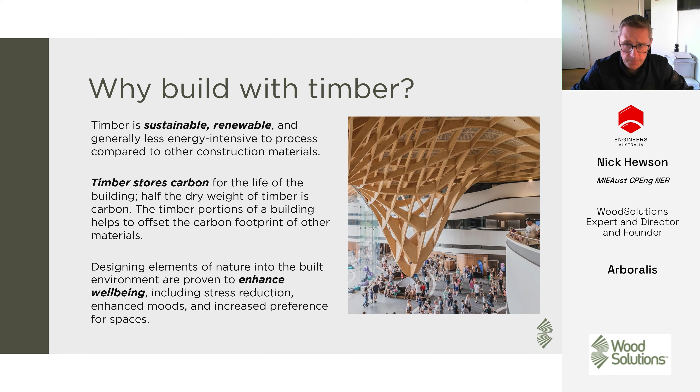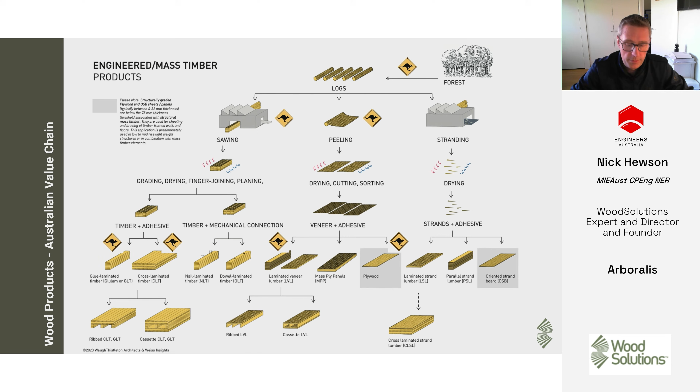So just a quick overview for those of you not familiar with engineered or mass timber. When we're talking around engineered timber, that refers to anything that is taking a tree, cutting it into smaller parts, and then putting it back together. So there are a range of different products in there, from things like plywood through to probably the big three that we talk around more often than not in buildings: cross-laminated timber or CLT, glue laminated timber or

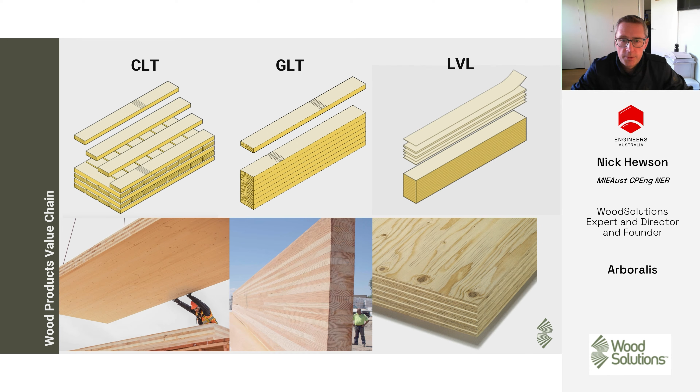GLT, and LVL. In the case of CLT and GLT, they're created by cutting up logs into individual sticks of timber, then gluing them back, either in cross layers to form CLT planks that create walls and floors, or glulam all aligned in the same direction to create beams and columns. LVL is a bit of a halfway house between the two. That's kind of like a jumbo plywood; it's created by peeling logs into lamellas and making those back into billets, which can be used for beams, slabs, columns. So it's really these three products that have captured the market in terms of mass timber buildings.

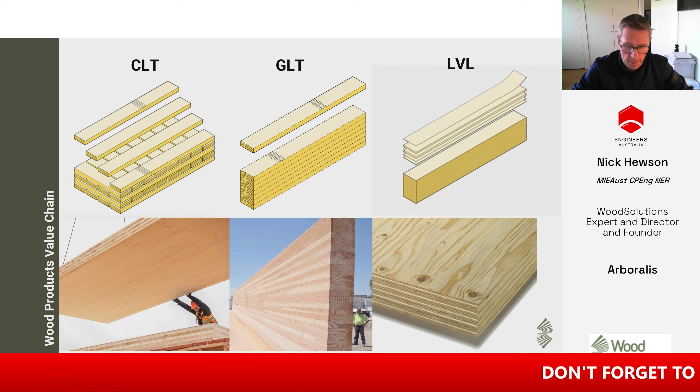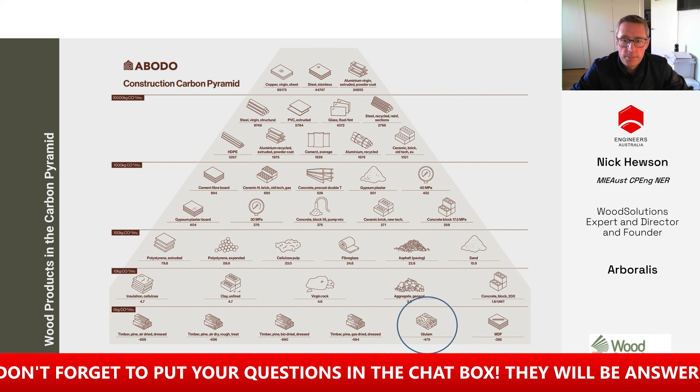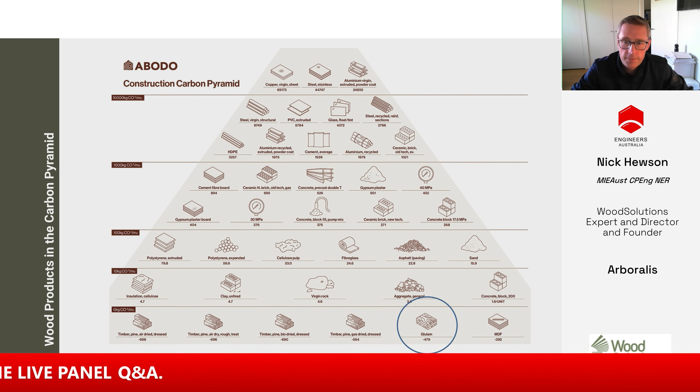So just looking at a little bit of the hierarchy of the construction carbon pyramid. As you'll see, timber products and engineered timber products like glulam are very, very low carbon if you include the sequestered carbon, which is the carbon that's locked into the structure as the tree grows. Through photosynthesis, trees take in carbon dioxide and produce oxygen, but that carbon is locked into the material for its lifetime. So it's a very environmentally sustainable form of construction when compared to others like aluminium, steel, concrete, and the like. So this is why we're focusing very hard on trying to get more timber into more buildings.

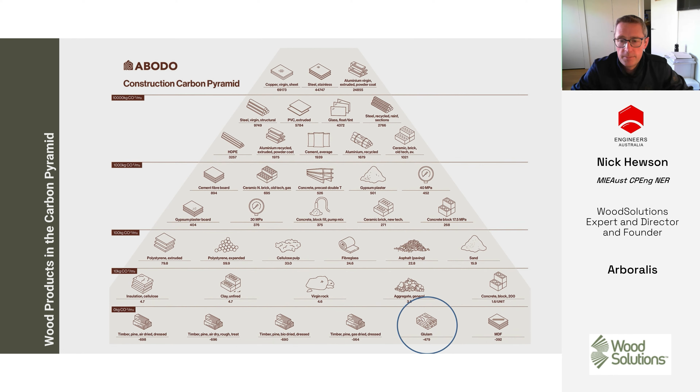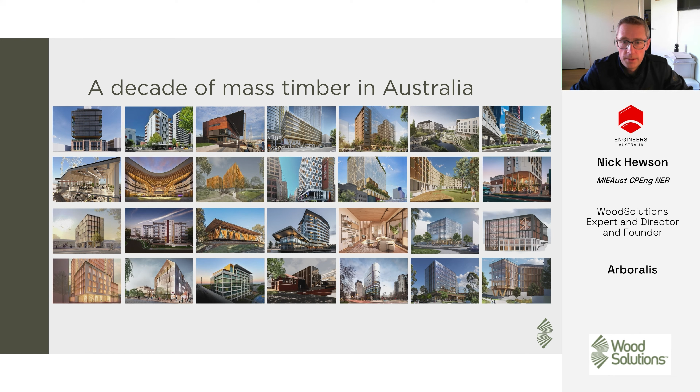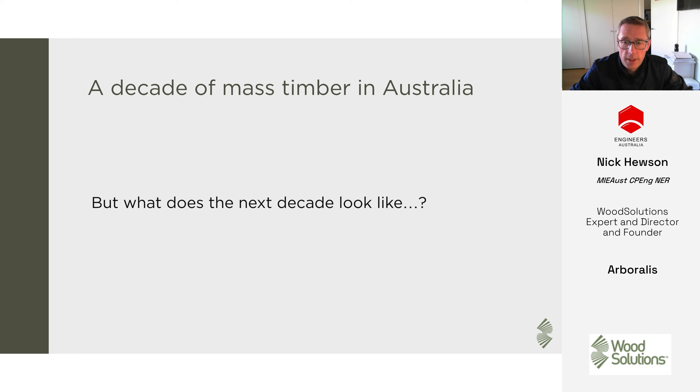We have a host of other buildings on there which have gone on to achieve worldwide acclaim, and per capita, I think, we've probably got an extraordinary number of mass timber buildings up, and really have some world-leading examples. But if that was the last decade, with a lot of purist, fully timber buildings, what does the next decade look like?

Increasingly, I think we're seeing timber start to find its way into larger high-rise buildings and into different building typologies, and what we're really passionate about is normalizing timber so it becomes just another structural product that we can use. It has its advantages and its disadvantages, which we'll run through. But we're trying to take some of the more carbon-intensive materials out of high-rise construction and substitute in timber where we can.

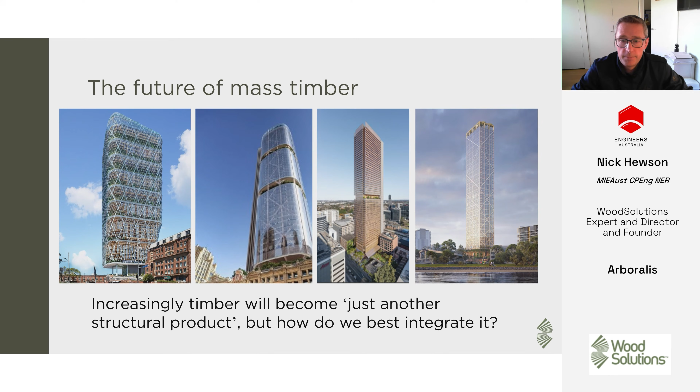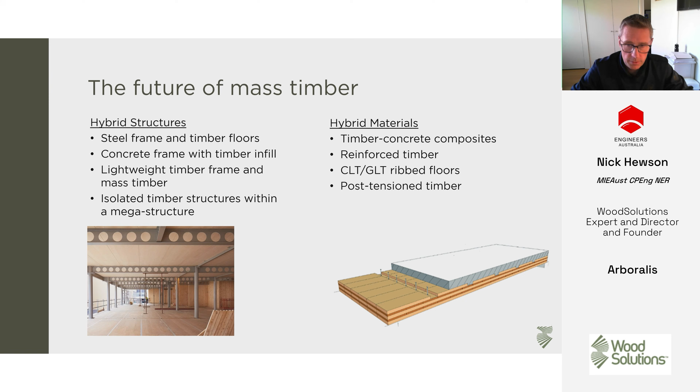So I'm talking about hybrids, both at a macro structural level, at building scale. That could be combinations of steel frames or concrete frames with timber floors or walls, or even lightweight timber framing together with mass timber, which I think has some particular benefits, which we'll talk about later in the presentation. And then we're talking at a more micro level of hybrid materials. So rather than looking at a building scale, we're looking at individual products, individual floors, walls, or beams. That could be timber concrete composite floors or reinforced glulam and the like. So we'll cover both of those throughout the presentation.

So I thought I'd break this down into some combinations of materials, just to show a few examples and work through some of the key areas that we need to consider when we're designing. Steel and timber to me is always a good match. There's a couple of examples here. One which I was lucky enough to be involved on in Melbourne was a vertical extension on top of an existing building, which they achieved using a steel frame and CLT floors. In that case, the timber was chosen because it was a vertical extension.

They needed something very, very lightweight. They needed the steel frame because the entire stability structure of the additional levels was all moment frames, because they couldn't really extend the core where it was. So the combination of materials there worked really well.

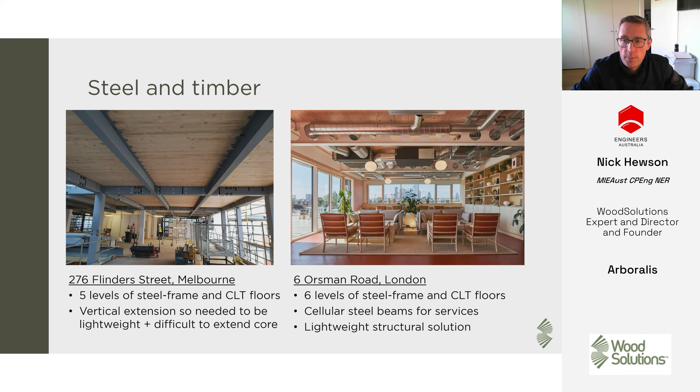On the right, one that I really like as well, it's a building in London which uses a sort of cellular steel beams for services reticulation together with a CLT floor and core in that example.

There's some slightly more left field examples. This is a building in New Zealand, in Nelson. So this is the Nelson Marlborough Institute of Technology, where they've actually been using steel post-tensioning cables. So that's there largely to help with seismic performance, but also what they've done there is used a sort of series of deflecting profiles to help the beam deflection and to reduce the amount of timber in there.

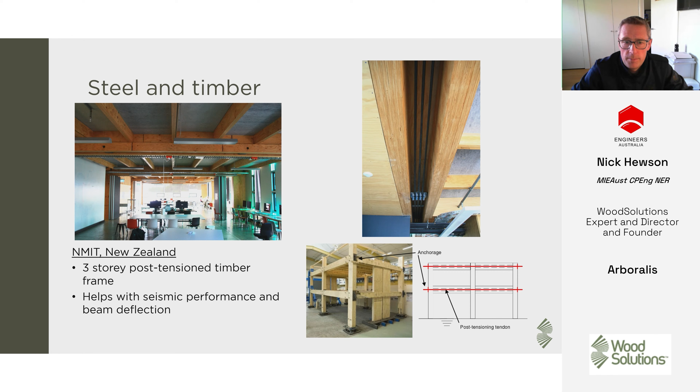So there's certainly an array of technology and different materials and different ways of combining these, which are starting to be under development. There's some really good research going on at University of New South Wales, where they're looking at technologies like steel beams and composite CLT. So at the moment, we don't really design our steel beams to take advantage of CLT floors and things when we put them on top, but actually we can find a significant degree of performance enhancement by doing that.

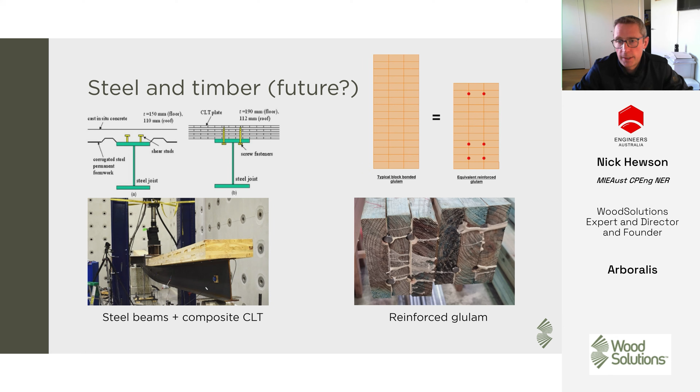Another technology that's also being researched is looking at reinforced glulam. So taking steel or carbon rods and bonding those into the glulam during the manufacturing process. That's got a number of advantages of improved strength and stiffness. A lot of this is about using the timber fiber more effectively. So we can use potentially lower grades of timber, which are not very well utilized at the moment, potentially going into paper, packaging, that sort of stuff. So we can take a very low grade product and, by using other materials like steel or carbon fiber reinforcing, turn them into a high grade product.

So just looking through some of the pros and cons of those. I always find that steel and timber works very well together. They're both dry trades. We're not reliant on backpropping like we might be with concrete. Tolerances are very similar. The construction language is very similar. So you've got the same subcontractor that's potentially installing both the steel and the timber together, making for far easier coordination on site.

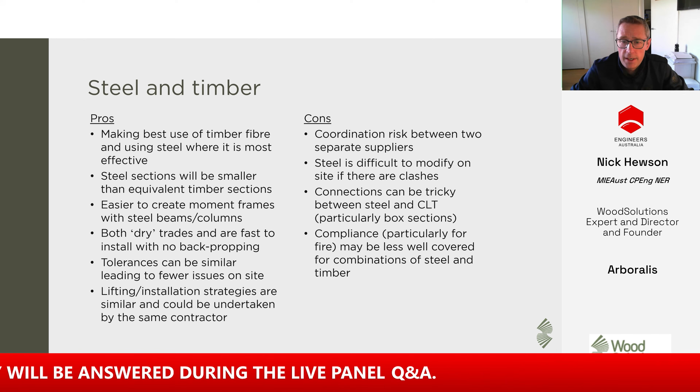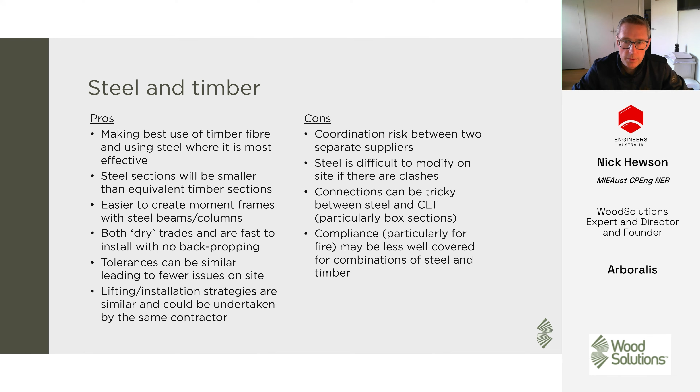Some of the challenges: getting that coordination ready between the two separate suppliers is difficult. Having enough tolerance designed into those connections, making sure that we don't need to go cutting and welding steel on site, is a challenge. Compliance, particularly for fire, is less well covered. Any combinations of materials when we're talking about fire testing, tested solutions and things is a challenge. So that's something that suppliers can assist with, but it bears particular focus at the start of a project to make sure that you have all those areas covered.

Concrete and timber. Typically, you find a lot of interfaces between concrete and timber, even on a more purist mass timber project. There will often be a concrete ground floor or suspended transfer slab. You may have a concrete core for fire reasons or for structural stability. But often what we see is what we call timber concrete composites. So that's often either a CLT floor or glulam floor with a concrete topping. We'll talk a little bit more about that in a second. But there's a number of examples around the country that have used that sort of construction language and technology, and it's certainly got some strong advantages.

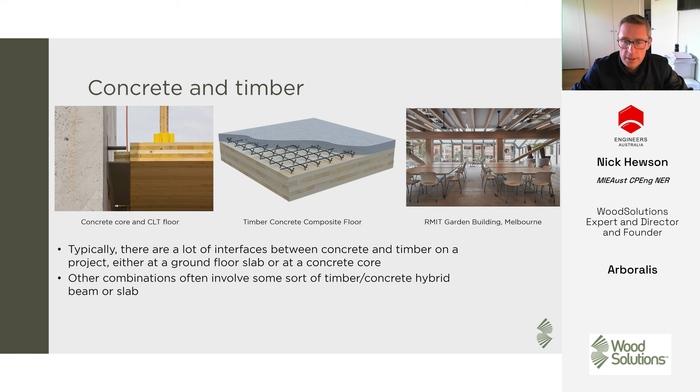So when we talk timber concrete composites, it essentially works by forming a shear connection between the concrete and the timber, so that the concrete's working where it works best in compression, and the timber's forming the tension element. There's a number of different ways that can be achieved through notches, plates, or screws. There are proprietary systems that are available. There's potential to design these from scratch. There are design guides available, some of those through WoodSolutions if you want to take a look.

And these have a lot of advantages, which we'll dig into in a couple of slides' time. One thing I will highlight now is that moisture element. So anything that involves a kind of wet trade together with the timber needs to be very carefully managed. And you'll see from the image on the right-hand side that they've got a layer there to avoid the moisture transfer between the two. Works both ways.

So you don't want the timber to get too wet because timber doesn't like to get wet. You also don't want to draw the moisture out of the concrete because the concrete won't cure properly. So getting those systems right is really critical to make sure that the building is going to perform.

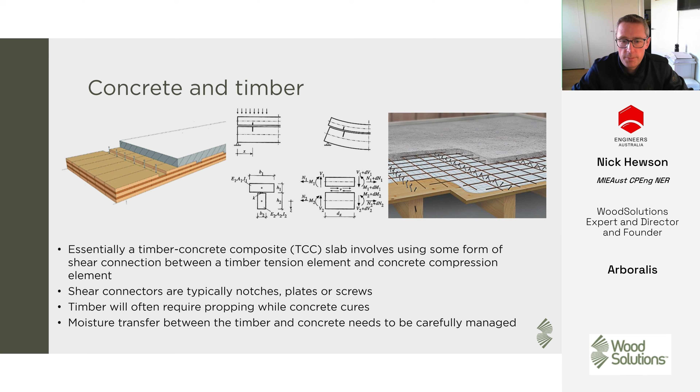But one system which is just coming on the market now is from a company called ASH, short for Australian Sustainable Hardwoods. They have what they call their Advanced Timber Composite Floor, ATC, which is a combination of Victorian ash glulam, a plywood sheet, and then a cast-on-site concrete topping. So we're looking at that on a few projects at the moment, where we're looking to expose the timber beneath and have a solid, robust system that's high performing for fire and acoustics.

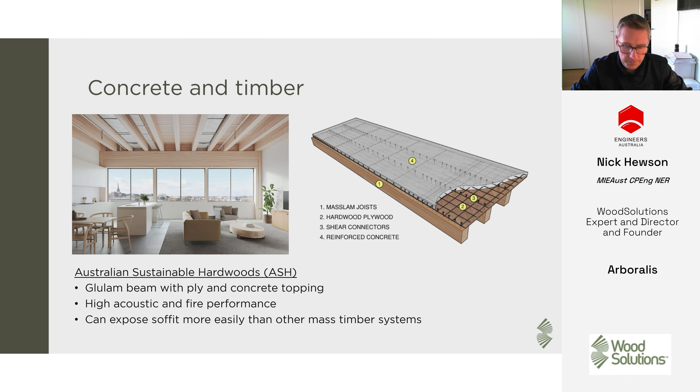And then there are even other ones. There's the Peikko Deltabeam system together with timber concrete composite floors, which I'll show from a project example a bit later in the presentation. This is an integral steel beam which forms a permanent formwork for your beam through your concrete slab. They work together with the timber bottom layer and then cast concrete through the whole thing.

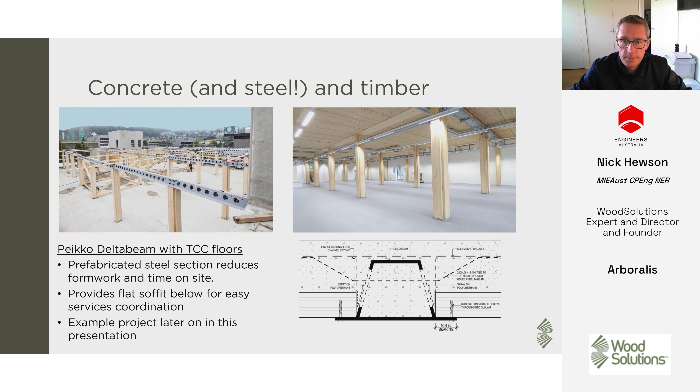One of the strong advantages of this is that it creates an almost completely flat soffit. So you don't have downstand beams, which you might with a steel or a timber frame building, which makes service coordination a whole lot simpler and has a strong advantage there.

So why put things together with concrete? The concrete does have a lot of benefits, particularly when it comes to fire, acoustics, floor vibration. Timber is a lightweight material, so it doesn't have a lot of acoustic performance, doesn't have a lot of damping in it. So in a number of cases, concrete performs a strong service there in improving that performance. It also gives you a natural diaphragm on top of your floor, which can make connections and design a lot simpler.

Some of the disadvantages: it makes the building heavier. Timber is often chosen for its lightweight nature, so that's obviously working against that. As I said before, that moisture control element is very challenging to manage, so that needs to be a big focus from the start. The challenges around fire stopping and interfaces is another. Bringing in that wet trade, having to back prop, things like that can add to the construction controls needed.

So there are some strong benefits, but some challenges to be overcome. So it's up to engineers to look at those on a project by project basis to make the best choices there.

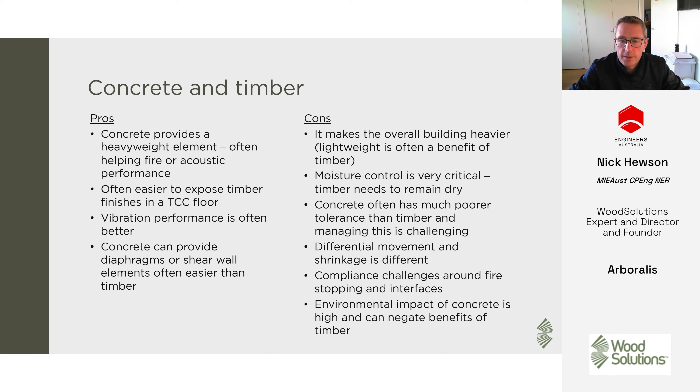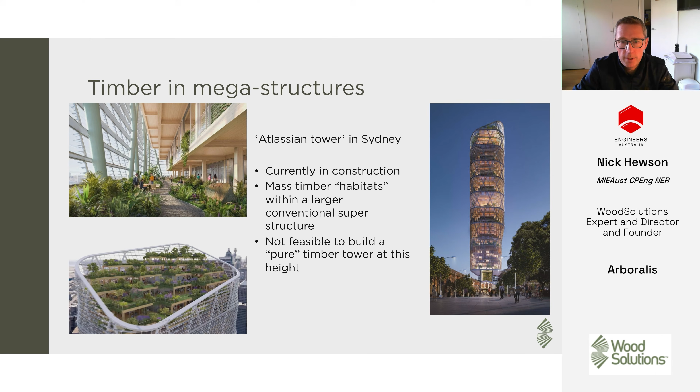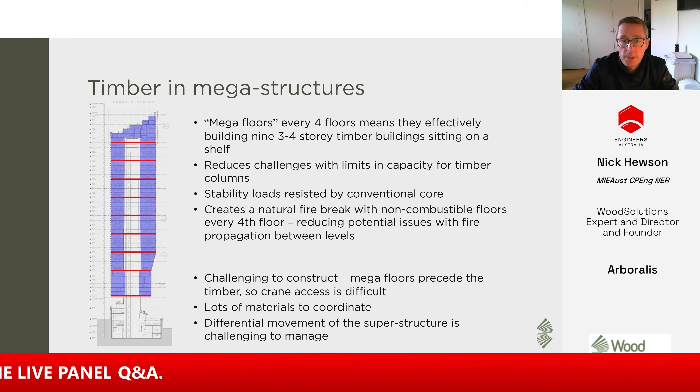The stability loads are resisted by the core, so you're not worried about the timber there. It's really just supporting itself over 3 stories, so the timber becomes a lot simpler. And one other huge advantage of this form of construction is it's creating a natural fire break. One issue that we talk about in timber is fire spread, and this goes a long way towards mitigating that.

So if a fire breaks out in a timber compartment and can't be contained, it's limited to those sort of 4 floors, and we can still maintain the stability and evacuate the rest of the building safely.

Some of the challenges for a system like that would be, in this particular case, those red floors are built before the timber ones, so the actual construction methodology is quite limited. You don't have a lot of space to operate cranes within those floors, so the actual methodology becomes challenging.

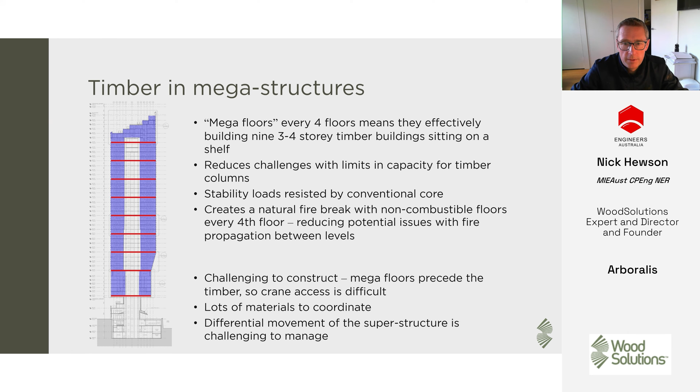There's a lot of different materials to coordinate, and also looking at the differential movement between the superstructure and the timber floors, and managing how those elements interact, and as the structure is built continuously and things move, trying to make sure that we've covered tolerances and things is a challenge.

This is one I've got a particular personal passion about, which is a sort of hybrid of mass timber and lightweight frame. There's a good example in Sydney, the Phoenix Apartments, which is 6 floors of lightweight LVL prefab walls together with CLT floors. So we increasingly see this as an option for that sort of low to mid-rise housing, social housing, and we'll see some examples again.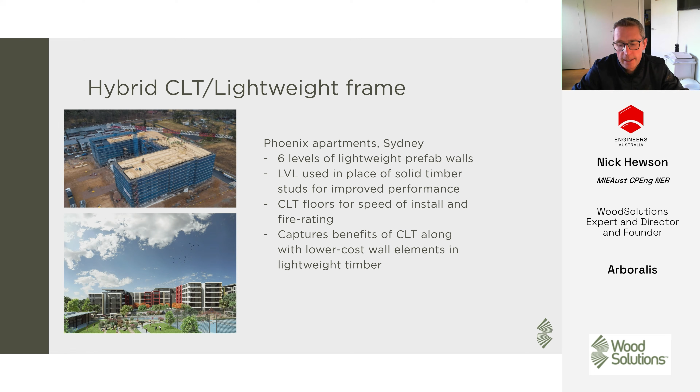But it captures a lot of the benefits of CLT, along with some of the economic, cost-effective solutions like pre-clad LVL walls. This is really taking off in the USA. So it's highly cost-effective for up to 3-4 story apartments.

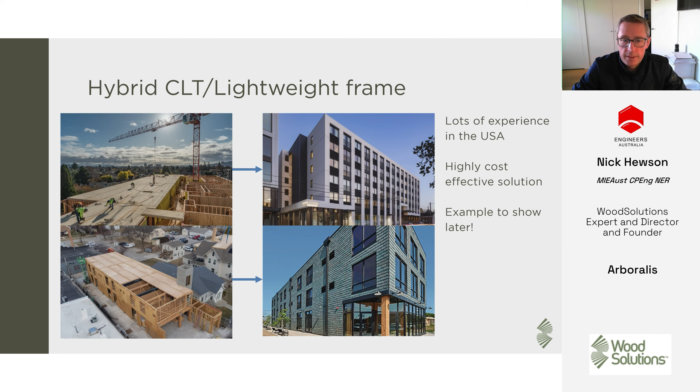The CLT floors are relatively cost effective, so they provide a very fast element for your floors. They have a high level of natural fire performance, and they give you a solid base at each level, making those junctions between units a lot easier.

Timber frame walls, on the other hand, are going to be a whole lot more cost effective than a CLT wall, particularly at that sort of height. You only need to think about a traditional timber frame wall, which may have 90mm studs at 600 centers. When you compare that to a 90mm CLT wall, you can see how much additional fibre is getting used in those walls compared to what you may need for a lightweight structural frame.

So we have a lot of opportunity in that missing middle, small apartments, townhouses, and things for this form of construction. Some of the challenges there are that the level of prefabrication you can get in those walls varies around the country. Some fabricators are doing fully pre-clad, closed-in walls. Other areas of the country may have less capability or capacity.

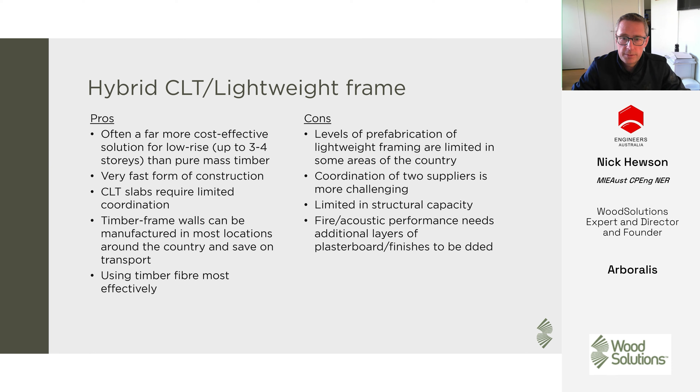So, if you're looking at this form of construction, I advise you to get out and speak to your local timber frame suppliers and see what sort of options and capability they have. There's that coordination piece between the two suppliers, which is still challenging. And then the additional fire and acoustic performance is still going to need layers of plasterboard and finishes to be added.

I put this in because I think this is another option for particularly multi-res buildings up to 15 stories high. So this is what we call post and plate. This is a combination of columns and CLT floors, utilizing a thicker CLT floor that spans in two directions between point supported columns. What this is doing is eliminating those beams, which can be both expensive and also difficult to coordinate around.

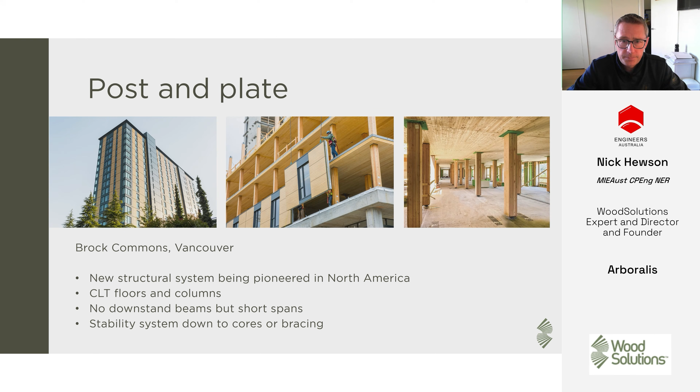And we're seeing a lot of development in the US around this space. This is where they're moving to now, the hybrid of steel and timber, utilizing steel columns because they're able to be fabricated and have these column capitals, as well as they're thinner. This one particularly has got steel frame braced cores as well.

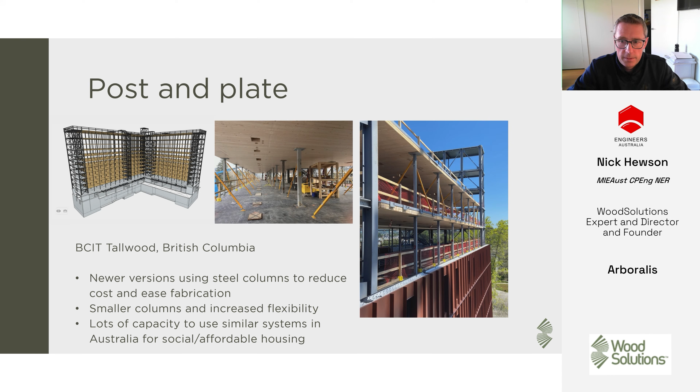This has been a game changer in the US, and there are an absolute hatful of projects that are starting to utilize this system. It creates a forest of columns, but it creates a lot more flexibility. You're not using expensive materials like CLT for your walls. So this is something that we're going to see more of in Australia in the next few years.

I just wanted to run through a few case studies that I've been lucky enough to work on, which have a number of different materials. This one is for a college in New South Wales. This is their Innovation and Science Centre, so quite a lot of lab and workshop spaces as well as some teaching spaces. So this one was tendered as a timber building above ground.

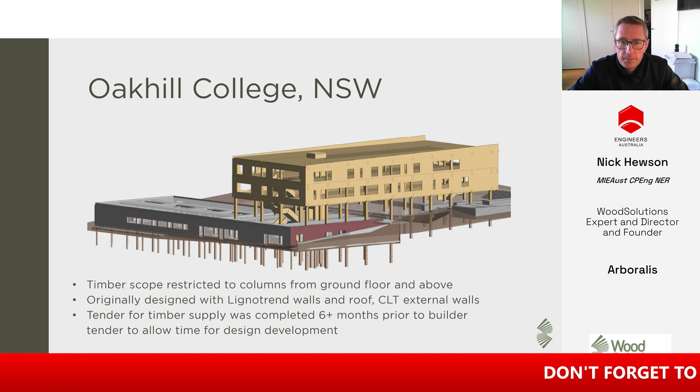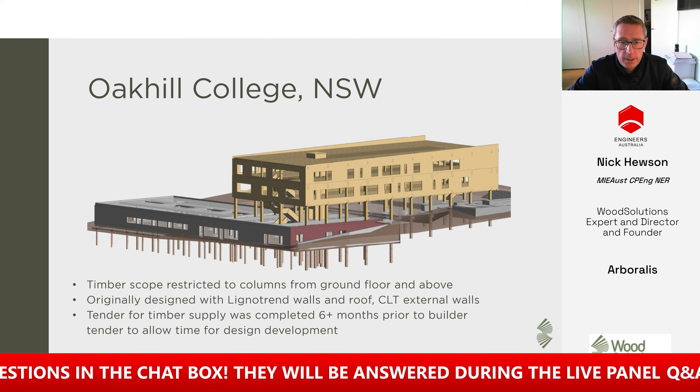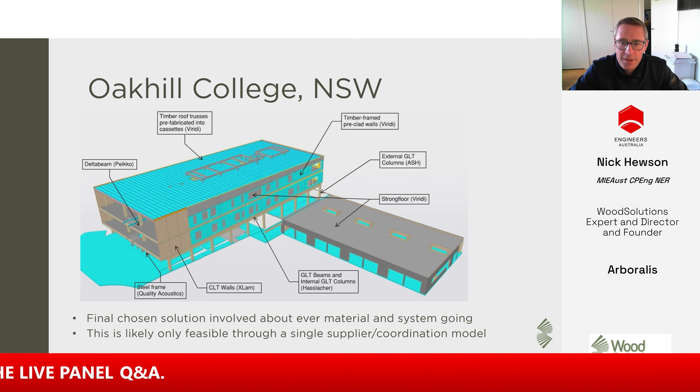That's those two suspended floors and the roof. They were built from Lignotrend and CLT, and then they had a concrete framed lower ground story there as well. So the company I worked for previously won this one, and what our solution was, and I'll tell you how successful this was at the end, but we had a number of different systems.

We had CLT walls, we had glulam beams from two different suppliers, we had lightweight prefabricated LVL walls, we had a timber concrete composite floor, we had steel frame, we had Delta Beam, roof trusses. So pretty well every system that we had available to us was thrown at this. And the only way this was possible was through that single supplier. For a builder or someone trying to coordinate across all these materials themselves, it would have been an absolute nightmare.

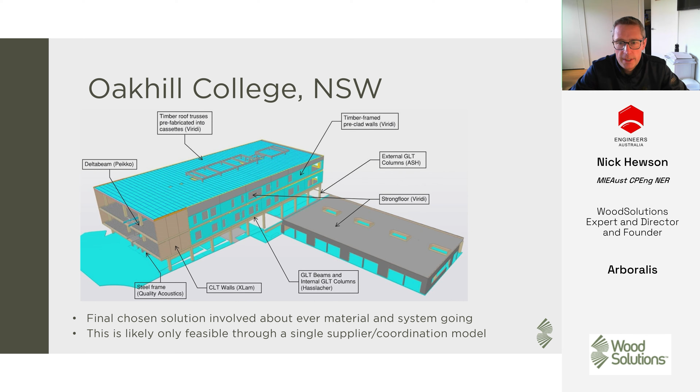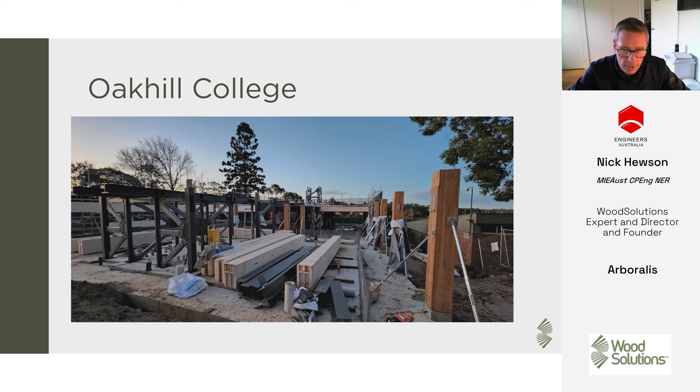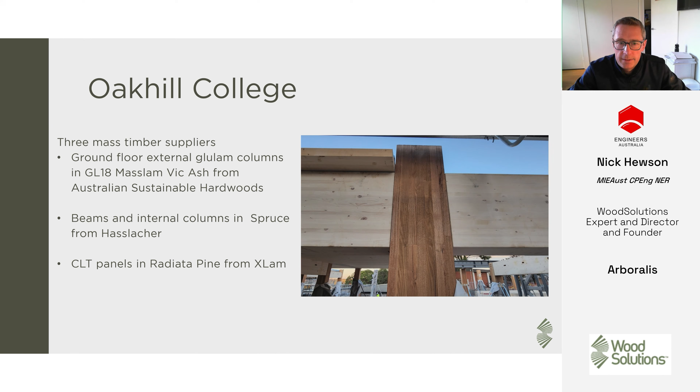This is just a picture from site showing some of the different materials. We had steel frames, braced cores. We've got two different glulam suppliers there. We've got the timber concrete composite floor going up in the background. So this one we had three separate suppliers, as I said, for the mass timber. We had GL18 Vic Ash glulam columns on the ground floor, chosen for durability reasons. We had internal spruce beams and columns from Hasslacher in Austria, as well as CLT radiata pine from XLam in Australia. So a real mishmash of materials in there.

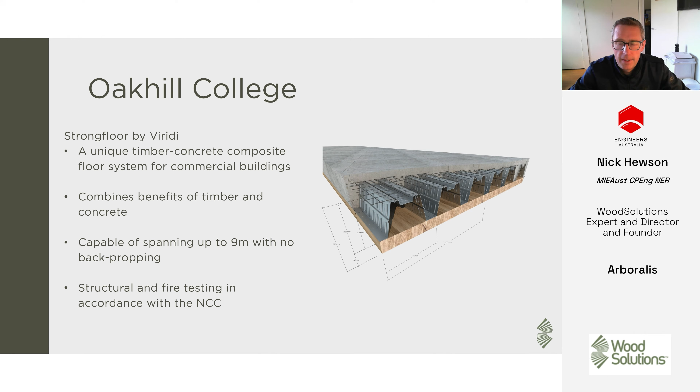We had a timber concrete composite floor, which was designed by my previous business, which is a combination of glulam, steel troughs and channels, and an in situ cast topping. So this was designed to be capable of spanning up to 9 meters with no backpropping, to give you that timber soffit that you can see from below, as well as that concrete solidity that you feel on the top. We also used Delta Beam for areas of the floor as well.

So I showed this earlier, but this was used for that services coordination. So you can see in the photo that we had some areas of glulam beams which were downstands. They had a few holes through them for services coordination, and then through the center of the building we used the Delta Beam, and that was your services superhighway basically. So all the main ductwork and things went down that corridor under a drop ceiling and then peeled into the classroom. So it really gave us a lot more flexibility in how we service the building.

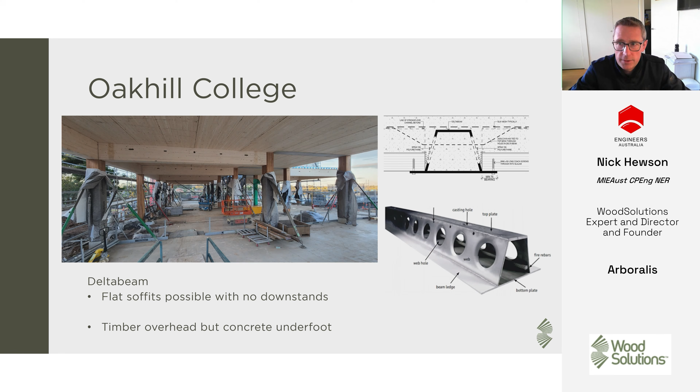This was the timber concrete composite floor going in on site. One of the challenges and lessons learned here was around moisture control. There's a significant amount of rain around Sydney at this time as we were building this, and managing where the water went before the concrete was poured was extremely challenging. It's something that we need to focus on a lot throughout these projects.

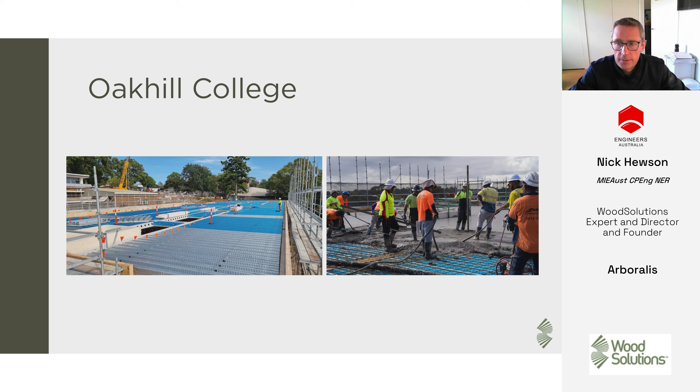The roof cassettes were much more domestic style, so just utilizing 90 by 45 timber roof cassettes, built out of traditional trusses. And these were all fabricated into up to 12 by 3 meter modules and then dropped into site, just spanning between the glulam frame. Very, very cost-effective way of forming the roof.

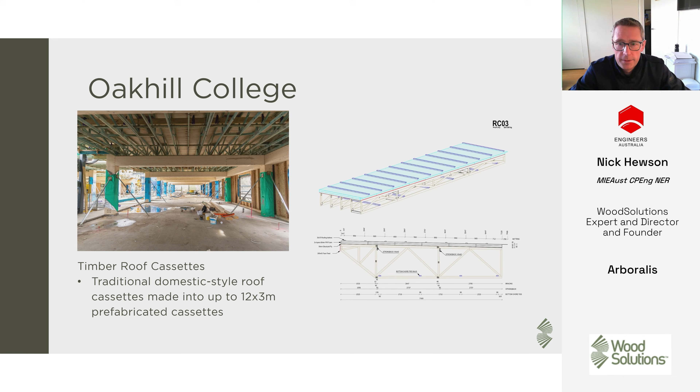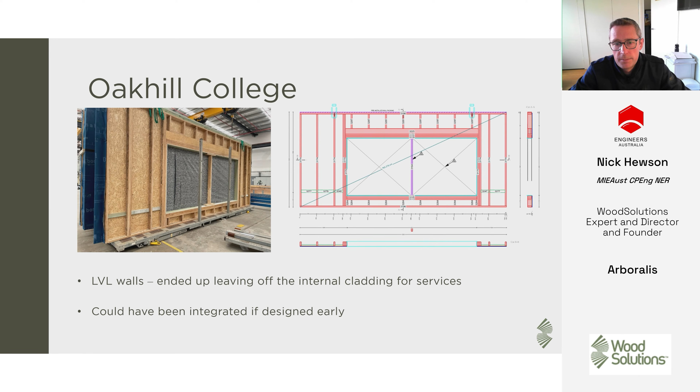And then prefabricated LVL walls for those non-structural components. We left off the internal linings of those so that they could come and do the cladding, the internal linings and electrical work. But we've been able to integrate services into those in other projects.

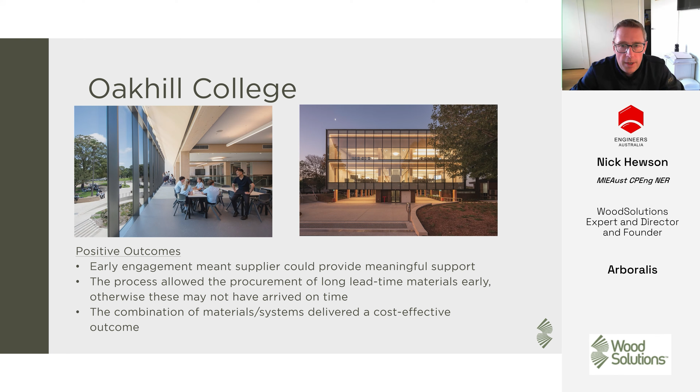So some of the positive outcomes out of that one: that early supplier engagement meant that we could really lead the design and provide that coordination element between the different suppliers. Given that some of the material was arriving from overseas and had a significant lead time, there was no other way of really achieving that. If we'd gone down a traditional path, it would have been another 6 months potentially before the building was delivered. And being able to pick from the different materials we had on offer, you could always choose the more cost-effective option.

Some of the lessons learned. The flip side of the last argument is that the procurement piece was challenging, because we had those long lead time elements, some of the materials coming from Europe; those elements got designed first and then had to be imported. So we were still continuing with design on some of the other elements as we went, and had to fit those around the decisions we'd made earlier in the process. Some of those would potentially have been made differently if we had the chance again, but trying to get that full design complete on all elements before you go out to suppliers would be an ideal way to do it if you can manage it with the time frame.

Design resources were significantly higher than we hoped. It took a lot more coordination than maybe we expected. Moisture protection, as I mentioned, was a large challenge through that combination of concrete and timber. That's something we would have concentrated on more in future projects.

And also tolerance. The different materials, how they meet each other, and how we get those to work is a large challenge. And in retrospect, maybe we could have thrown a few less systems at it to make that coordination piece a bit easier.

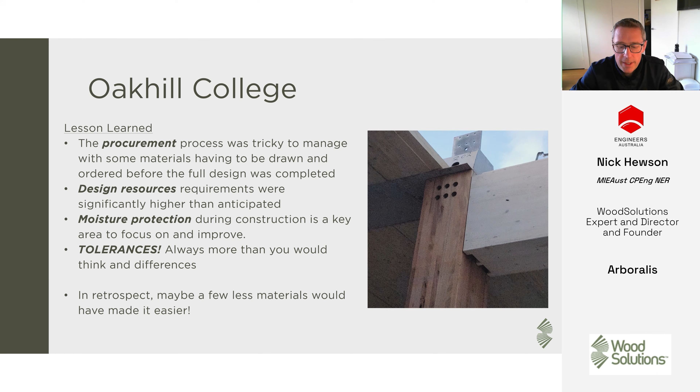The next project I wanted to share was some defence housing. A total of 9 two-storey modules and 2 single-storey modules. This was a project delivered using lightweight timber framing, some steel beams and screw piles for foundations, prefabricated LVL walls and roof cassettes, and a CLT midfloor.

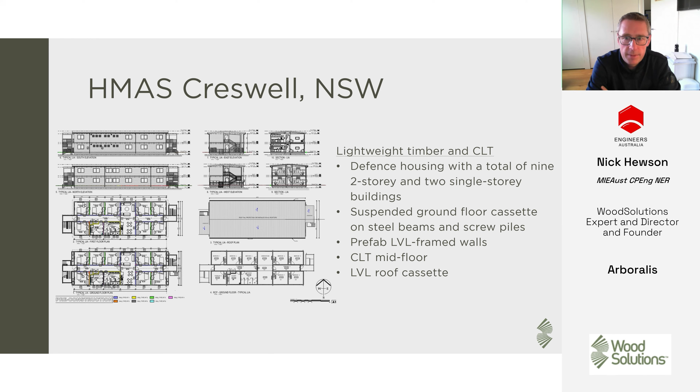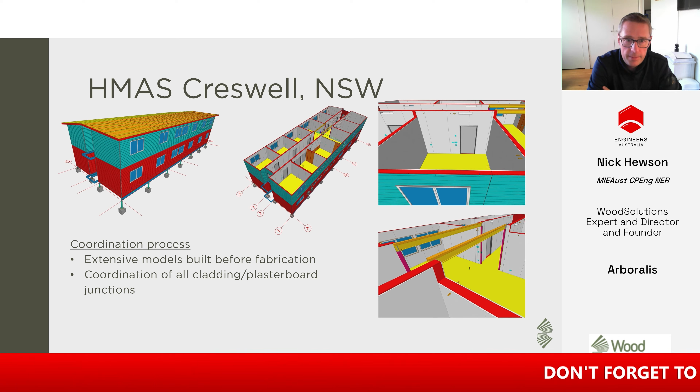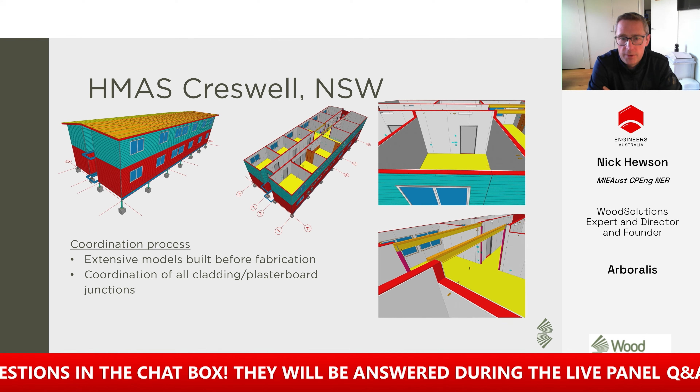The reason I want to show you this one is just to highlight how cost effective this combination of lightweight and mass timber can be, particularly for low-rise construction. This was a large amount of coordination, particularly as you have nine modules all the same. So that design time is well worth spending resolving every last detail and junction, so that when you repeat it across 9 buildings, you're building something very, very efficient.

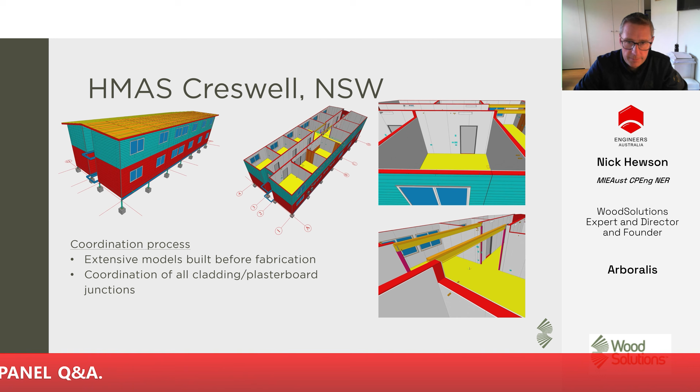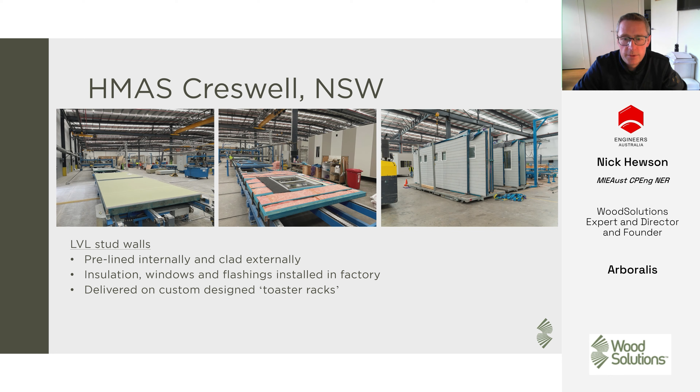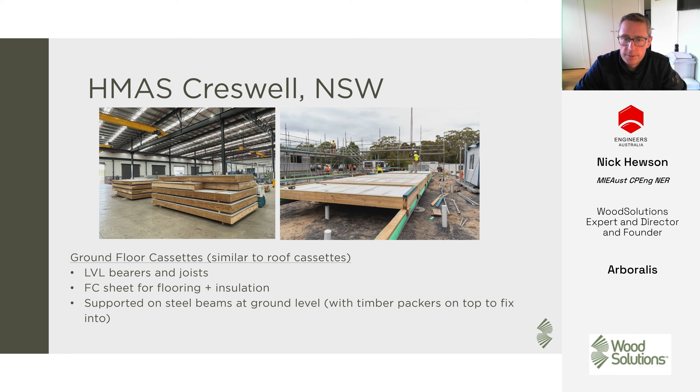One of the biggest challenges we found with the foundations was working out exactly how to install these quickly and efficiently without having to work under the cassettes and fix up through steel flanges. So we developed a system of timber bearing plates on top, pre-installed to the steel, that we could screw from the side or from the top, so we didn't have to access underneath.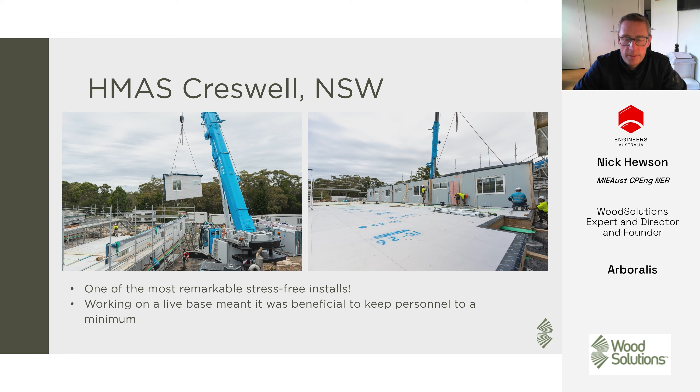And this was one of the most remarkably stress-free installs that we've ever had to work on. Working on a live naval base meant that it was very beneficial to have few people on site. So this off-site modular construction methodology made so much sense for this particular project, because every employee was vetted and had to go through security checks. So keeping that to a minimum was critical.

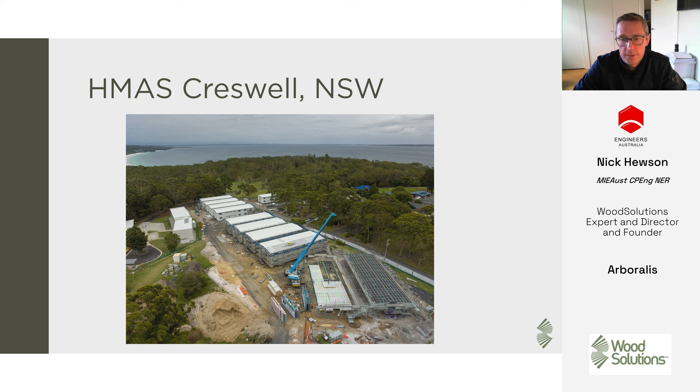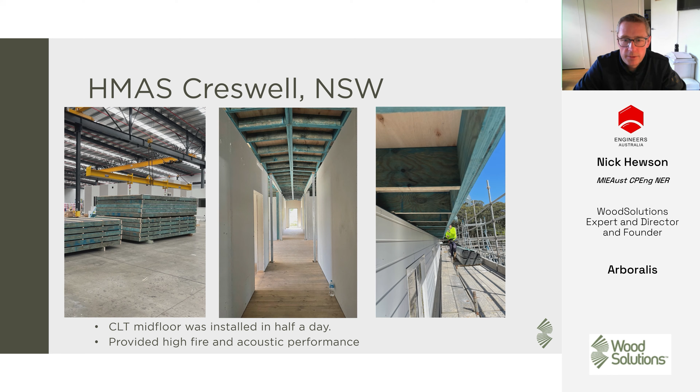But the construction on this was way faster than anyone even anticipated. It was very, very successful, both from an install and from a manufacturing perspective. That combination of the CLT mid-floor worked really, really well. Very fast to install, just in half a day, and it provides that baseline of fire and acoustic performance.

And the builder said afterwards it's one of the most cost-effective ways that they could ever have delivered that, including volumetric modules. So it was hugely successful. It's probably not going to win many architectural awards, but the outcome was exactly what the client was looking for. The builder was blown away by how fast and easy and cost-effective it was when they compared it with other systems.

Some of the things we may do differently next time: I think that ground floor cassette may have been even more efficient in CLT. Definitely that early engagement with the supply chain was critical to this. And then there's further capacity to optimize this through pre-installation of services.

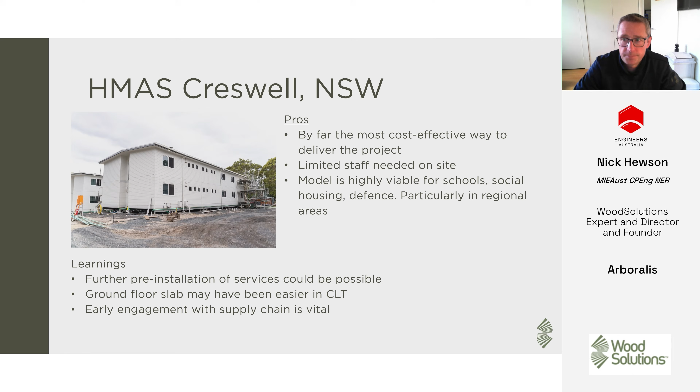So winding up now. Why have we been talking about hybrids? As I said at the start, that reduction in embodied carbon in buildings through the wider adoption of timber. Should we be trying to use more timber in more buildings rather than build one purist fully timber building? I'd love to see more use of timber, particularly in high-rise areas, to help offset some of the heavy carbon materials in those.

But being realistic, using timber where it works, but using other materials and other systems where we need them, whether that's structural capacity or fire performance, not being afraid to combine those or utilize the right material for the right job.

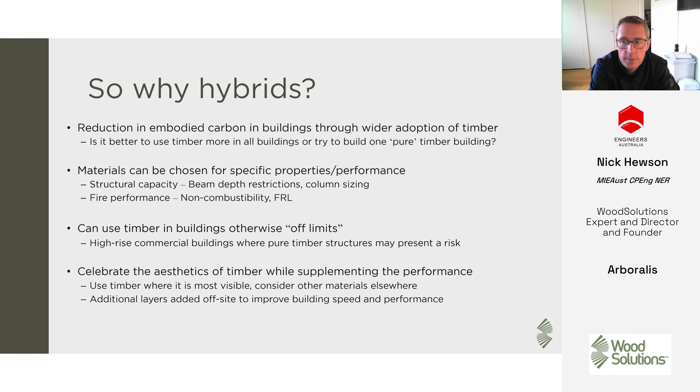And using timber and using hybrids to get into buildings that otherwise maybe wouldn't support a fully timber solution. And then also to celebrate the aesthetics of timber for what it is. So, getting capacity to expose those details through the addition of other materials like concrete to supplement acoustical and fire performance, so that we can really celebrate the material where it's best suited.

So some of the barriers. Coordination risk is a big challenge. So the more materials you add in, the more interfaces and the more opportunity for errors. We've seen that on some of the examples that I worked through. So establishing those tolerance matrices early. Which element is going to be your sort of skeleton that you build around? Is it the steel? Is it the timber? Is it the concrete? So where do those different materials meet?

How do you deal with their different properties for fire and acoustics and things? What do those junctions look like? There are a lot of solutions out there. So engaging with particularly the timber supply chain who can provide that information.

The procurement risk. I think we're seeing more and more suppliers and fabricators start to be able to offer these additional services, whether it's supplying steelwork or glulam or CLT, or in the cases of ASH, providing their flooring solutions. So suppliers and manufacturers understand this and are starting to offer more and more solutions. So again, encourage everyone to get out and engage with that supply chain.

And then on the design side, that level of coordination required between those can be heavier. So we've got to allow sufficient design time and coordination prior to fabrication to make those savings in time on site. So encouraging clients and engineers and designers to really hone in on those fine details and interfaces.

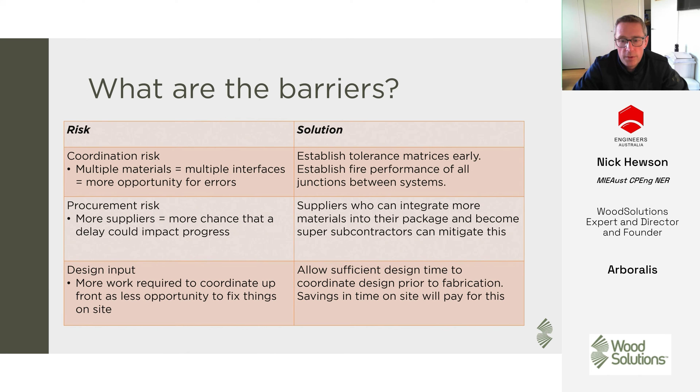So summarising, we want to see a reduction in embodied carbon in buildings through encouraging wider adoption of timber. Choose the right material for the right job. Just because you can make it timber doesn't mean it should be. We should always be looking to optimise for the right solutions, and don't be afraid to mix things up to come up with something cost effective.

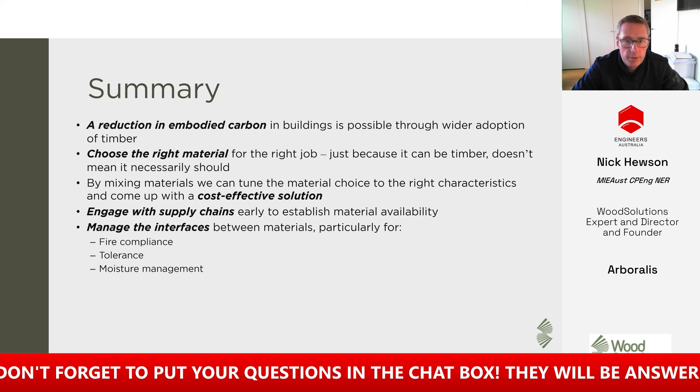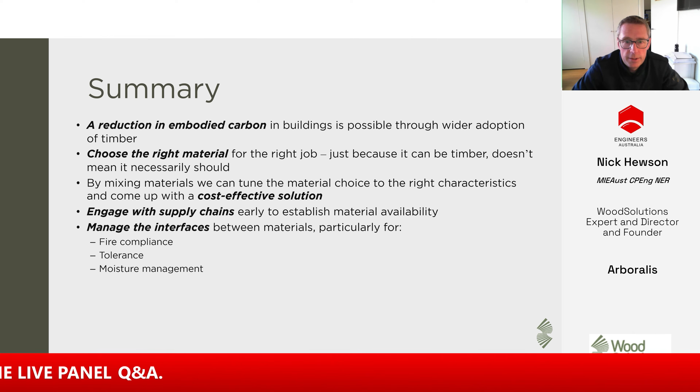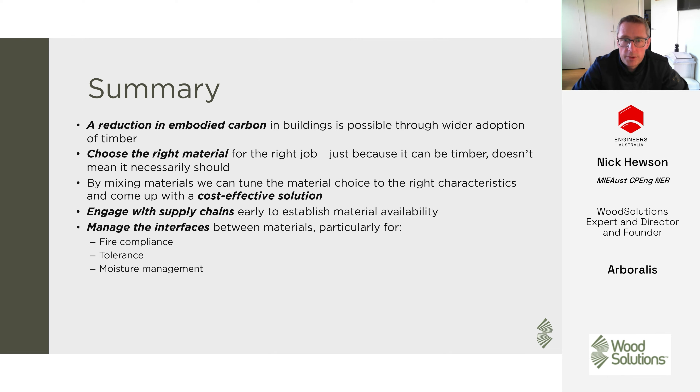Engage that supply chain early; particularly the timber supply chain is ever changing. They're always offering new solutions and services, so keeping up to date with their capacity and capability is critical. Making sure that we manage those interfaces between the materials, looking particularly at fire compliance, tolerances and moisture management. So if we look after those, then you're going to have a much more successful hybrid timber building.